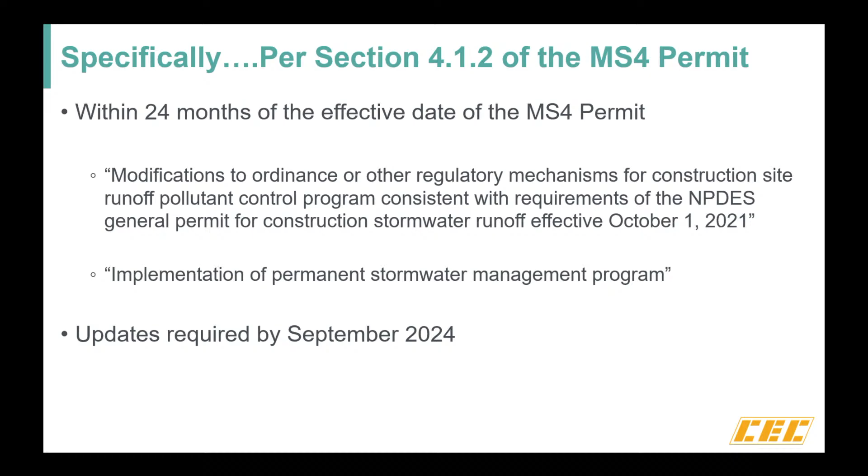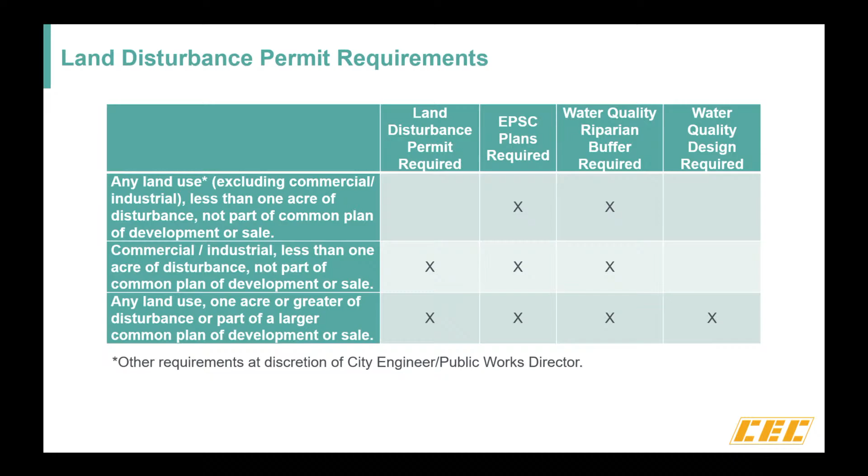Okay, so these are some of the EPSC updates that I felt were more important. With the current CGP that's out, it allows for disturbances to go over 50 acres with some additional requirements from TDEC.

It's very difficult for the city to manage a site with more than 50 acres disturbed at one time, especially from a municipality standpoint, because they've got to have boots on the ground inspecting per their MS4 permit. We wanted to help them meet their permit requirements, but you guys could still disturb over 50 acres if needed. Currently, if you're going to exceed that, you'd have to meet all the requirements per the CGP with TDEC, including some monitoring and sending a shapefile of your disturbance.

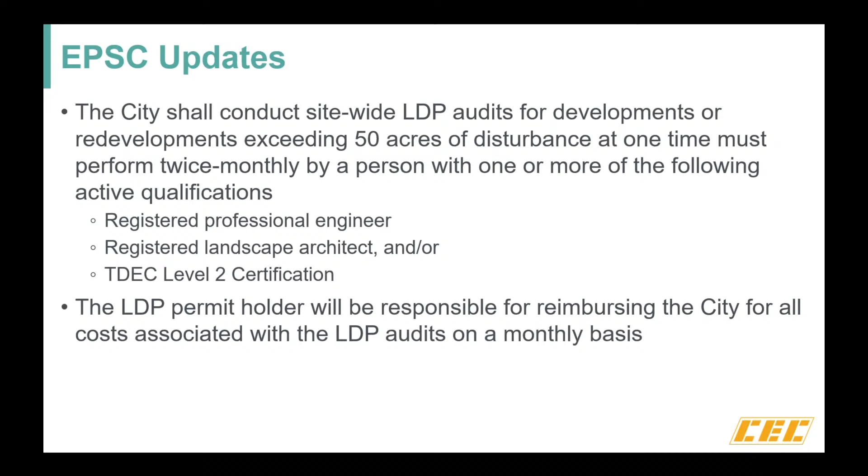In addition, from the city standpoint, they're going to want to see twice-monthly LDP audits performed by either a PE, RLA, or someone with TDEC Level 2 certification. The city would be requesting someone to do that specifically, and you guys would reimburse the city for that inspection, supplementing their staff, because once it goes over 50 acres, that's a big burden considering they only have one inspector. We're not saying you can't do it, but we need help, because that's a significant amount of disturbance and we still have to hit our requirements. So that's the main thing with the 50 acres or more.

The other thing is if you're going to get a land disturbance permit that involves calculations and associated EPSC plans, they need to be prepared by a PE or an RLA with an active TDEC Level 2 certification. There is a caveat: if you're a registered PE or RLA without an active Level 2 certification, you can still do that, but once we get to a third submittal where we're providing comments on the EPSC plans, that engineer or RLA is going to be responsible for the third-party consultant's invoices relating to how much that EPSC review costs.

That's really just to offset the cost to the city. There's significant cost in making sure these plan reviews get done and meet the standards necessary for the city to feel good about carrying out their permit requirements. This is just a reminder to make sure you're following the rules. Theoretically you should know the rules, because hopefully you're taking training from the state via the TDEC Level 2 certification, which would help you put together a cleaner set of plans that meets the requirements of the CGP.

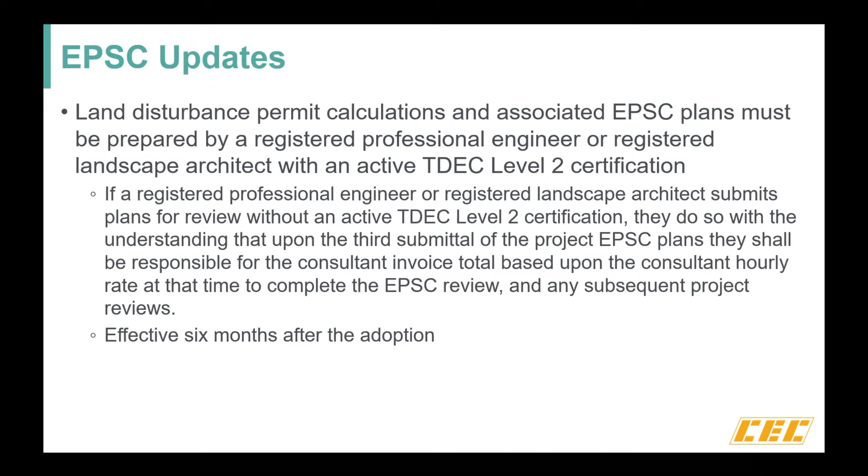This is effective six months after adoption, so that would be October, November, December, January, February, March — March 10th is when this would be effective. So just keep that on your radar and consider that.

Another EPSC update involves when you can remove sediment basins or sediment traps. We're requesting that the city be notified prior to removal, 14 days in advance, so they can come out and confirm that everything upgradient of those has been stabilized appropriately. Then they'll give clearance to convert or remove it entirely. We've had instances where they got converted too early, and the site just wasn't ready for that.

And so that's the main reason for this, because it's not going to be a fun conversation if the city tells you that you've got to put a sediment basin back in after you just converted it to another pond, or maybe filled it in. So that's really what this is for, so that you guys are on the same page with the city about when this happens, because those are significant drainage areas if a sediment basin or sediment trap is required. It's a lot of water. That means there could be a significant discharge of sediment, which would be very bad for the city in terms of meeting their water quality requirements.

The other thing that got updated was the LDP duration section. So basically, if you pull an LDP and get that green light from them, it will stay active until one of these things happens. If you have 6 months of no activity on the site, no dirt moving, then that would be your permit duration expiring. Or it's 3 years from issuance of the permit, or if any new federal or state regulations occur that change the scope of coverage. That would be like if a new CGP is issued or a new MS4 permit is issued that backdates some of those requirements.

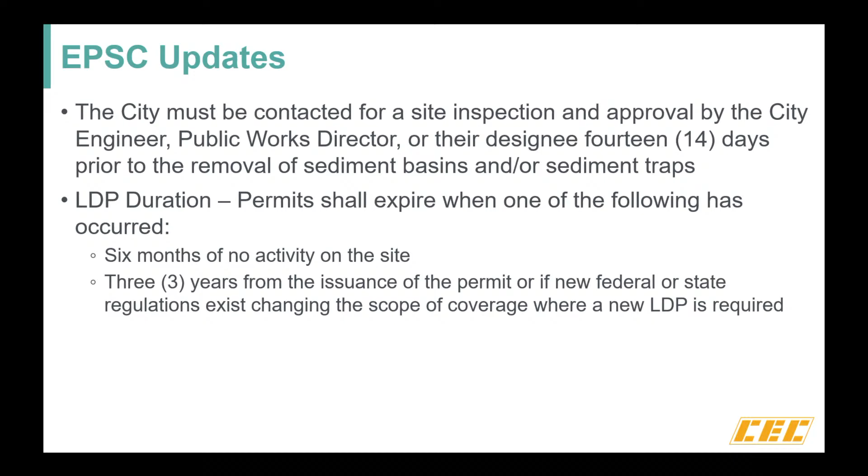So that's that. And then this goes into the water quality riparian buffer things. This is what I was talking about for the 2 upper rows of the chart, where you're not disturbing greater than an acre and you're not part of a common plan of development or sale. If the chart says you're required to do water quality riparian buffers, which I believe applies to the whole chart, any disturbance basically, if you're along a stream you should have at least a 15-foot buffer from the top of bank. So that's this requirement. It's pretty reasonable from a floodplain perspective.

If that stream is mapped or unmapped, there's also additional floodplain requirements. In general, this isn't too big an ask, because if you have an unmapped stream, that means FEMA has not designated a floodplain for it. You have to provide a buffer of twice the width of the stream on either side. So if the stream is 7 feet, you're already at 14 feet. Just something to think about. Unless you had a really small stream, you'd probably be hitting this anyway.

And then for A zones, it's very similar, you have to have a 20-foot offset from the top of bank, so that's greater than this. And if you've got a full-blown mapped stream with a floodway associated with it, that's usually significantly larger than the buffer width required on those properties. It just depends. Sometimes there's a high wall, like some of you have seen at Mansker Creek, where one side is just a straight cliff wall. That's a little weird because usually the floodway hugs that wall, but in a lot of instances the floodway is actually larger than that.

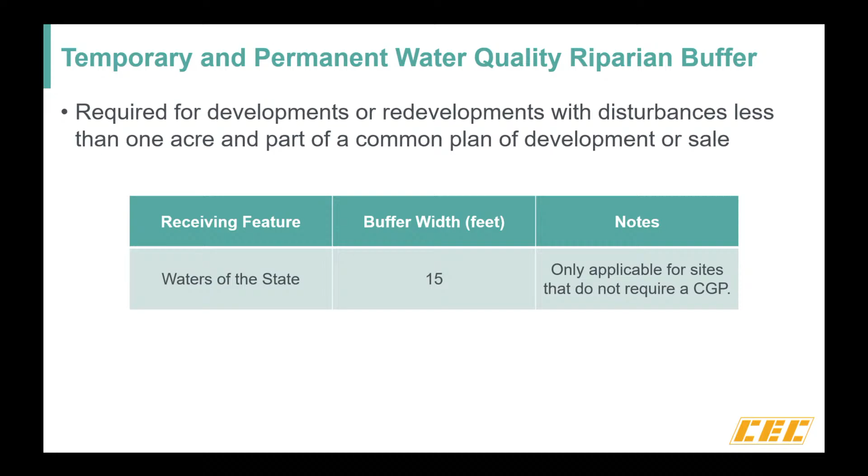And if you're in an area discharging to an exceptional Tennessee water, or a water that is impaired for sediment, siltation, or habitat alteration - and additionally, waters with federally or state threatened and endangered aquatic animal species - as some of you may know, the city of Hendersonville has a lot of streamside salamander, which is a state threatened endangered species. That's kind of the caveat for this one.

Sometimes there's a significant gap between finding that species and TDEC being able to put it on the exceptional Tennessee waters list. In an effort to protect that species more, this is how the city of Hendersonville has decided to handle it. So if you're near a stream already listed as an ETW for streamside salamander, you'll probably want someone to check if that species is on your property. The city will likely ask about this during review, but if you talk to them beforehand and they know there's likely presence, you can figure that out early. It's always good to have initial conversations with the city before doing anything wild and crazy, especially if streams will impact your buildable space.

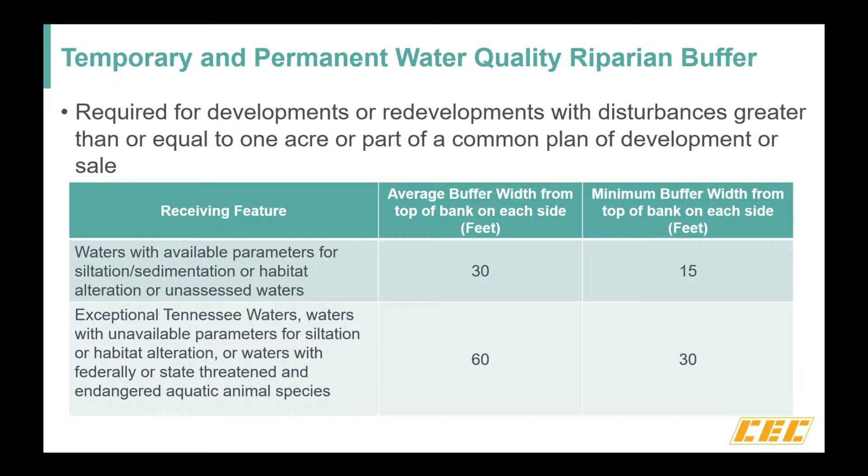There are some allowable, permissible uses within that permanent water quality buffer, and these are all listed in the ordinance. Greenways, biking trails, and walking trails are allowed. Within the outer buffer, you still have to maintain that minimum unless you go an ARAP route and have a crossing or something like that. The trails have to be constructed of pervious materials if they're going to be a completely allowable use that you don't have to offset.

If it's constructed of impervious materials, then you either have to direct that runoff to an infiltration-based SCM, or in my opinion, the easier way to handle this is to just provide that additional buffer width somewhere else, like alongside the trail on the other side of it, or somewhere else on the property.

You can also have infiltration-based SCMs in the buffer, but you're going to have to make sure you have infiltration in those areas, which is usually difficult right next to a stream because the groundwater table is high, so think about that before you try to do that. It's probably not going to work out necessarily. And then you could have road and utility crossings and selective landscaping and or habitat improvements.

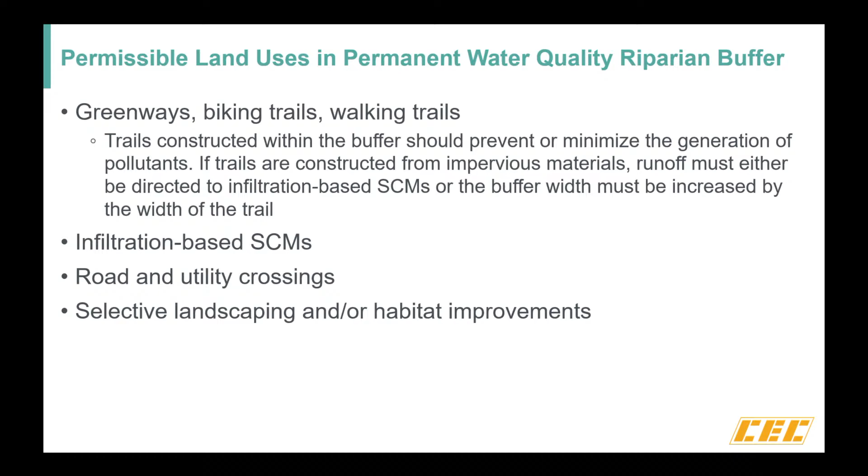So this is usually where I'm like, infiltration-based SCM, what's an SCM? An SCM is a stormwater control measure. It's a big part of the new MS4 permit. From TDEC's perspective, it's a permanent practice and a measure designed to reduce the discharge of pollutants from new development or redevelopment projects.

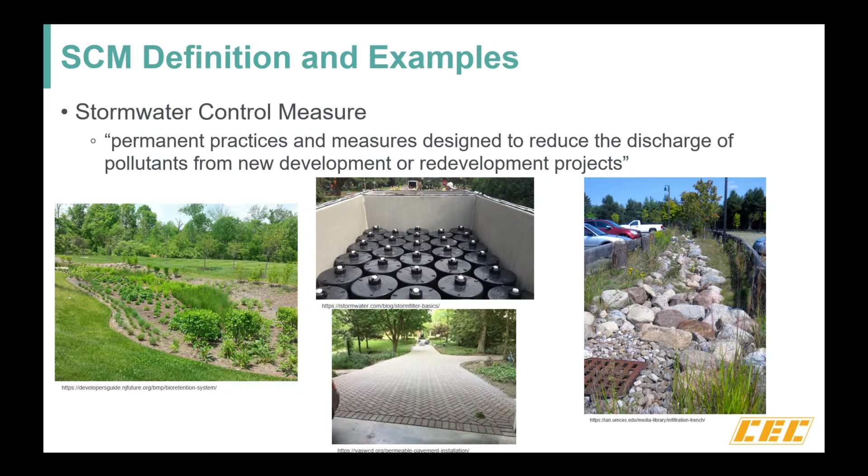You've probably seen these a lot in other cities, so it could be permeable pavement, bioretention, to a certain extent it could be extended detention if designed correctly, infiltration trenches, it could be a proprietary practice such as a filtration system. It could even be paired with a hydrodynamic separator potentially. So those are the types of measures we're talking about, which brings me into the water quality treatment volume requirement.

I'm sure this will be published or sent to you guys in an email, so I highly recommend taking a look at that video, because I don't want to rehash all this, but just know that this is an additional requirement. It's new. TDEC got it passed via a rule, and then they included it into the permit. So this is something that's going to be sticking around for a while. I recommend figuring it out and learning to work with it, because it's here.

And alongside that, you can probably guess that because we have that chart, because it's required by anything that disturbs greater than an acre as part of a common plan of development or sale, we're going to have a lot of these things, which is just as exciting for you guys as it is for the city, because they've got an additional thing they have to worry about too.

In this, the permit requires that they come up with a way to make sure these things are installed the way they were put on the plans within 90 days of final construction of the SCM, which, hopefully to you guys, it's just as exciting for them, because now they've got something else to track and run around and be like, oh my God, was it installed? Was it installed correctly? Do I have proper documentation? Because if not, TDEC is going to be mad at me.

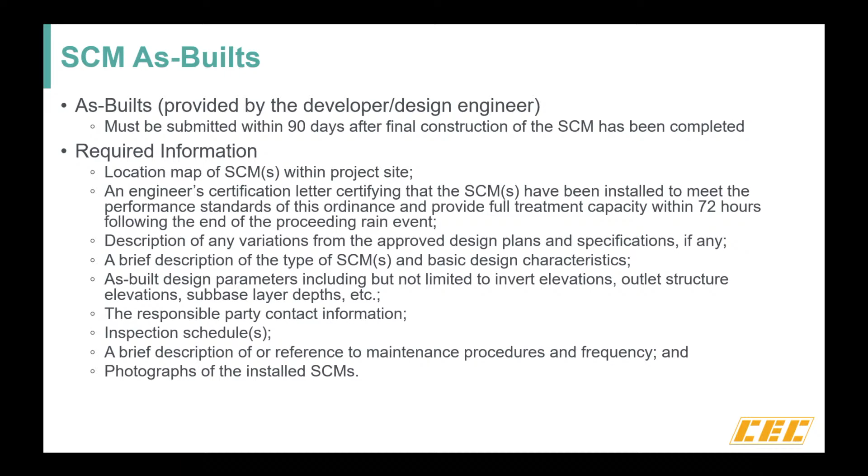Another requirement in place for a while is that the city has to know where all of their stormwater inputs are. So if the city owns it, it's dedicated and operated by the city, and there's an inlet that eventually discharges into a water of the state, the city has to know where that is.

A lot of this has been done over time by consultants going out and physically mapping these areas, so Hendersonville has a really good base for what's out there right now. But as we build and get all these neighborhoods and people move in, we have to know where those inputs are again, otherwise the city would have to go out and map those again. The contractors are already out there putting the things in the ground, so they generally know where they are.

So what we're asking for is the location of those, the direction of flow - this is all information TDEC asks of the city: location, size, direction of flow, things like that. We've tried to make it a little easier - we've put together an Excel spreadsheet where you can list all these assets, the flow direction, and that will help facilitate the city putting it from Excel into their GIS mapping program, so we don't have to put it into GIS for you. Otherwise it'd be in a different format, and it'd be a disaster.

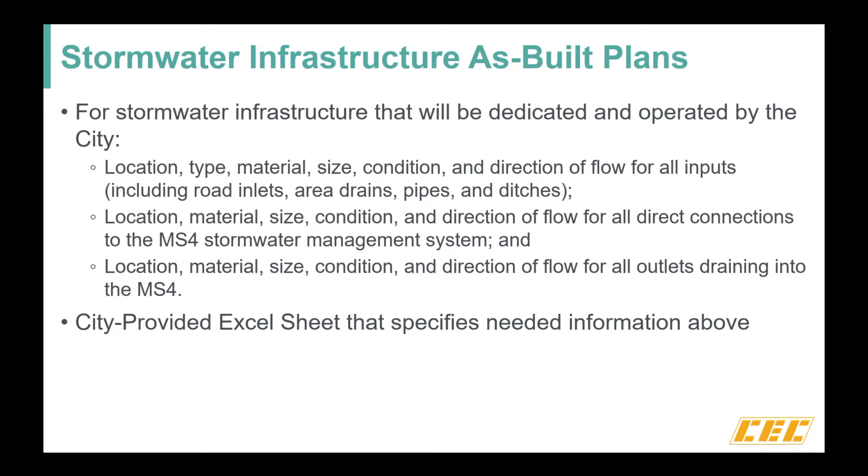So once you're getting close to finishing a project that's going to have a lot of infrastructure dedicated to or operated by the city, I'd reach out to the city because they have this Excel spreadsheet, and we can help explain that in any way needed to facilitate that happening. And now I'm going to stop talking.

Are SCMs going to be part of this? I know you had a category there of treatment. Is that similar to what Metro has now - is it 80% TSS? Yes, TSS is used as an indicator, and it has to be 80% TSS removal.

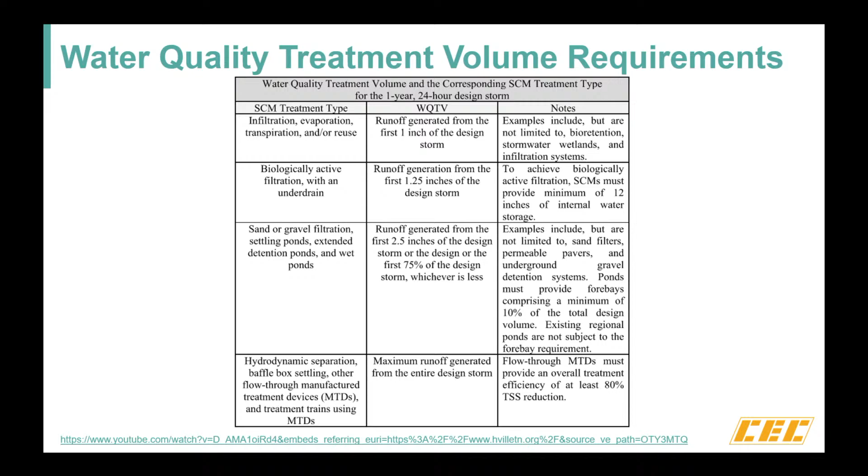The volume is what's largely different from Metro. Metro is, I believe, all based off of a 1-inch storm event, which is similar to the first row of this chart. As you move down the chart, the volume gets larger, so the practices generally get larger in turn. That's pretty much the basic thing - so it's similar, but not really.

Metro's permit will be updating too, because this was a state rule. When they get there, they're not a small MS4, they're a large MS4, so when their individual permit gets updated, it will include this chart. So in the next couple of years, it will hopefully all be very similar across the state instead of having different requirements. Anybody else?

Just before we move on, I guess? No? Okay.

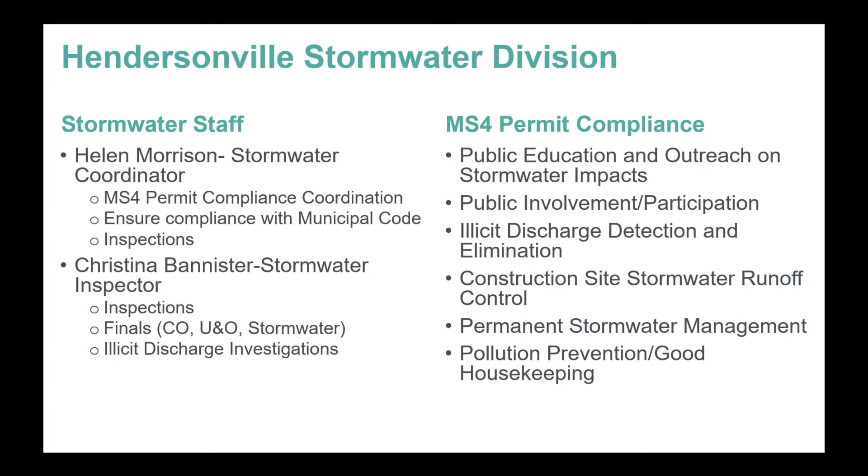For construction site stormwater runoff, really the main component there is land disturbance permitting. I'll talk to you about the process changes we've gone through over the last little bit. The city implemented an EnerGov application, and you may be familiar with it if you've worked with some of the surrounding municipalities.

I think they've also used the same thing through Tyler Technologies, but it's called EnerGov, and then kind of the user-facing side of it is Citizen Self-Service Portal. So I know Gallatin uses the same thing, so if you've done construction in Gallatin and gone through their permitting process, this is very much going to be the same. But the biggest change for us was absorbing the land disturbance permit plan review into the planning review cycle.

Right now we have site plan, construction plan, planning department review. Your EPSC reviews are going to be incorporated with that review. So we've updated the checklist to incorporate EPSC requirements and ask for the appropriate documents so that everything's combined and accomplished and reviewed in one review period, versus the back end where you would get your stamped approved plans from planning, and then you would come see me, and I would crush all your hopes and dreams and tell you it was going to be another 4 to 8 weeks before you could start construction. So very much so, this is a more efficient process.

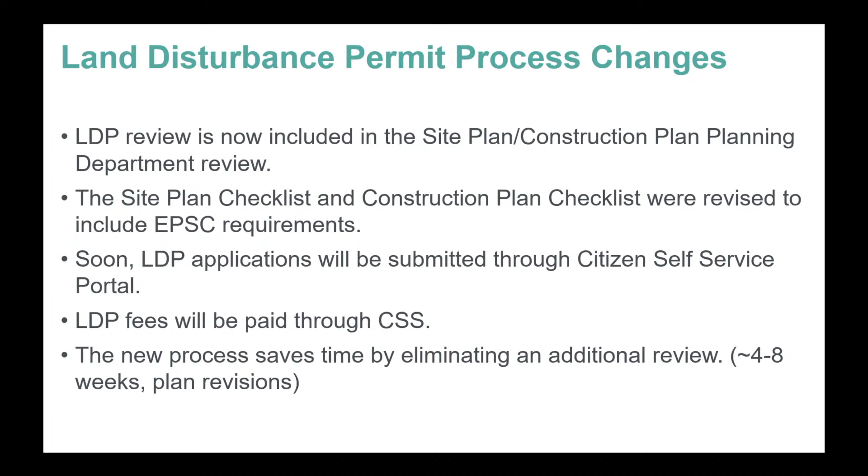But if you'll take a look at everything, you'll have the planning review. So that'll go through that cycle. They're on a pretty strict, like two week review period, so they're not going to be stagnant. A lot of times with LDP, before we started working with consultants, we had a lot of lag time just because it was me and one other engineer looking at plans. Once we moved into working with CEC as our review consultant, we had a set time frame, but now with planning, the time frame's even shorter, so the turnaround's quicker. You're looking at typically 7 to 10 days of getting comments back from the city. So a much more efficient process.

Once you get your stamped approved plans, you'll submit your land disturbance permit application. Right now, that's coming directly to me, generally through email, but we're slowly transitioning to the Citizen Self-Service Portal. So you'll go online, take your stamped approved plans, complete the application, fill in all the fields, submit your plans and other supporting documents, and go through the process that way. It'll hopefully be a seamless, quick process.

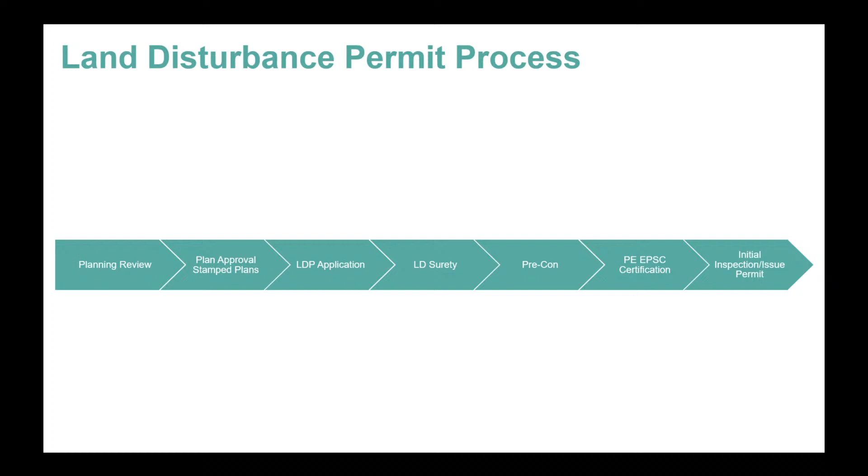So just a few details about the land disturbance permitting process. Christina touched on those. During the planning review, either internal engineers or an external consultant will review the stormwater quality and quantity.

Generally I'll go out and do preliminary investigations when we get a site plan or construction plan submittal, just to ensure that all water resources have been properly identified. Sometimes, if we see something questionable, that results in a request to do a hydrologic determination. We've had a few of those, but a lot of it revolves around protecting those resources and checking to see if it's suitable habitat for the state endangered streamside salamander.

Your land disturbance permit must be submitted with all your applicable state and federal permits. So really, we're focused on the construction general permits, ARAPs, and any Corps permits. Then, of course, your surety, which is $10,000 per disturbed acre, and we round that up. Recently, in our discussions for our stormwater management program, we talked about adjusting that annually using CPI as a guide.

And like I touched on before, a PE must visit the site and inspect the installed EPSCs and certify those prior to us scheduling an initial inspection. The reason we started doing that is really just to save time, because you have so many sites ongoing and starting up that we'd be going out to the same site three, four, or five times for something simple like a construction access that just wasn't installed properly. So that's why we really harp on following your plan and following your details.

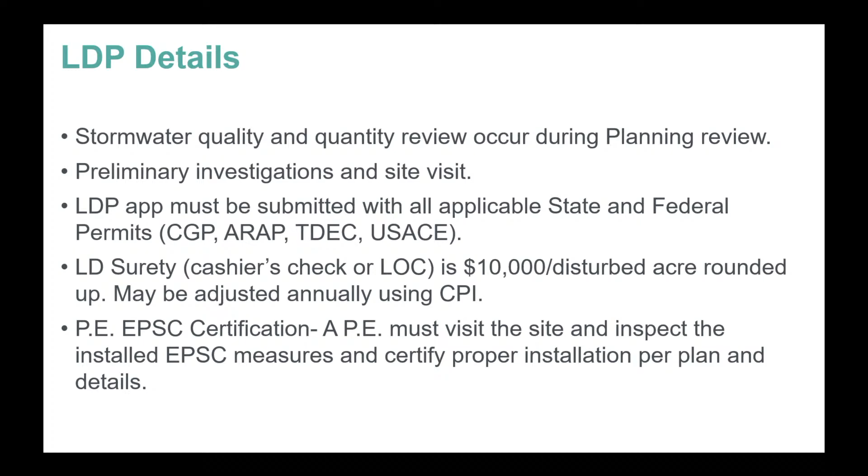So Christina talked about the 15-foot water quality riparian buffer requirement for individual lots, covering individual lots in general that are not part of a subdivision or larger common plan of development. CEC provided us with a form that they used for Bowling Green, and we modified it to suit just individual lots in the city. So this way we have a quick form that a homeowner can fill out.

They can select the option of what they want to install for their erosion prevention and sediment control if they're putting a pool in or doing any kind of grading activity on their property. That way we don't have to issue a land disturbance permit specifically - it goes through the building permit process.

So this is just a form. If you are a home builder in the city or you're building in a subdivision, this is a form you're going to see when you go to get your building permit for each lot. Hopefully it's something that's easy to fill out and quick, and you can quickly identify by selecting an option or combination of options what you want to install on the lot. But it's really more or less just a way to communicate with anyone doing work within the city, whether they're an individual property owner or a developer, that we have the expectation that you're going to install EPSC measures on each individual lot, and you're going to keep sediment on your site.

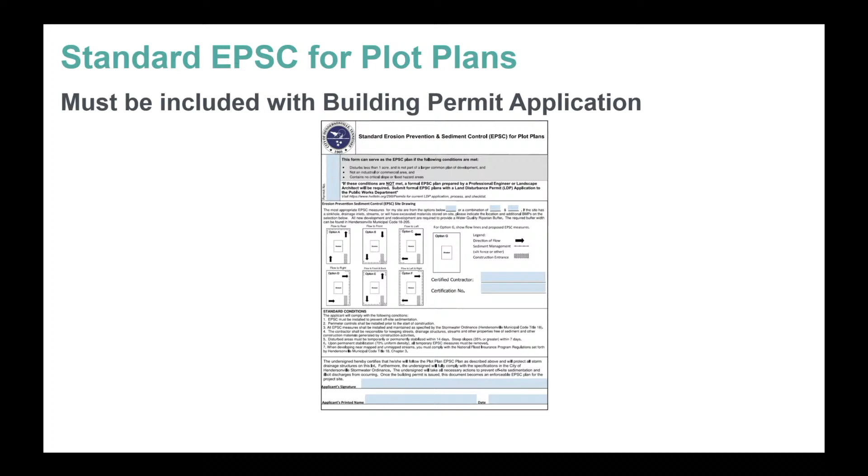So we did talk about the streamside salamander. They are state endangered, and there are several different requirements that go along with being a host to this amphibian. The main one is your ETW stream buffer requirement, so you meet the criteria for a 60-foot average buffer, 30-foot minimum, but that's the minimum.

The other thing is we really encourage coordination with TWRA and TDEC on this. So if you are developing and you have a stream that's probable habitat, we're really going to look closely at that. TWRA is requiring surveys if you are within a 4-mile radius of a known salamander presence in another stream - they say that's kind of loosely based. Like here in Hendersonville, they've said more than likely we're going to ask for surveys just because they're everywhere in Hendersonville.

So that's their general requirement. They want you to do a salamander survey between December 15th and March 15th. You have to do 2 of them, and they have to be at least 45 days apart. We don't require that—that's a TWRA requirement.

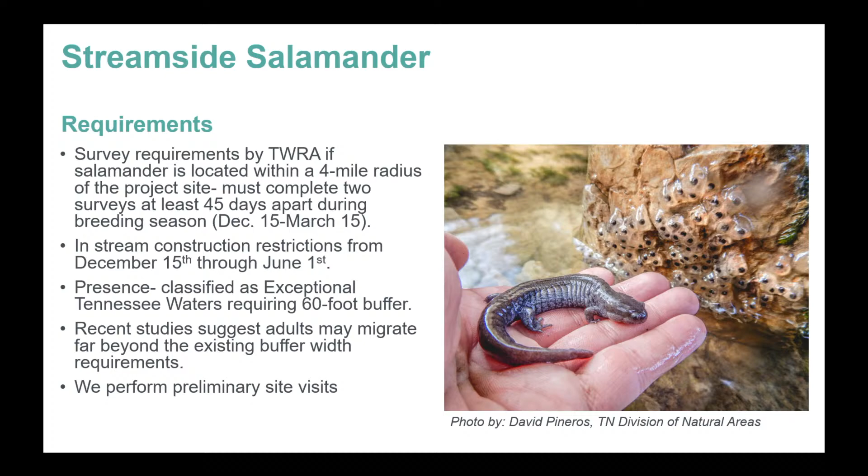So like I said, we do perform preliminary site visits to go out and investigate. If we see a need, we will communicate that through the plan review.

If you have gone and applied for different permits or inspections, you've probably already seen it—you probably already have an account. Biggest thing is you do have to register for an account to be able to use it. For our purposes, we want you to use a good email so that the same email can receive pertinent information about inspections and permitting and all that.

I just went over that standard EPSC for plot plans—that's something you're filling out when you get a building permit. You do not have to apply for a land disturbance permit if you are less than an acre. Now, if you are building an individual home and you are going to be grading, doing land disturbance activities that exceed an acre, you would be completing the land disturbance individual lot application.

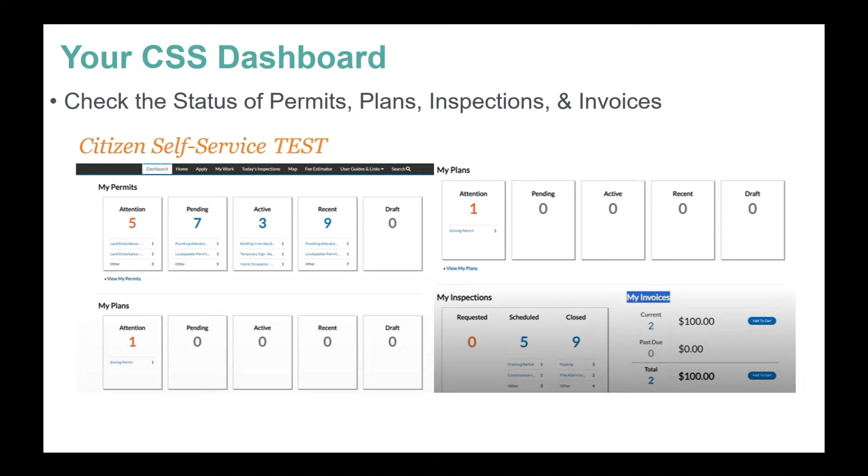Hello everyone. I'm here to go over some stuff with you guys, and just an introduction to me if you haven't dealt with me before: I've worked for the city of Hendersonville for about a year now. I previously worked for the city of Gallatin and the city of Union City, so I've worked throughout the state of Tennessee. I also took a little hiatus to the private side of construction, working for large data centers throughout Georgia and Alabama, but came back to where my heart is, local government.

We'll be covering some facts about pre-construction meetings, during construction, what the expectations and desires are for the city of Hendersonville, and bringing you up to key points and questions you may want to ask to help you be successful as you're building in the city of Hendersonville.

When you get done with your CSS portal and you have successfully got a stamped set of plans with our city, you'll be instructed to get a pre-construction meeting with me. I call it a team meeting - we all get together, meeting of the minds.

There'll be some required attendees, such as the permittee, which is the responsible party, the general contractor, which should be signed on to the notice of coverage or notice of intent, the grading contractor, which has the same responsibilities, and then the twice weekly inspectors, which are vital to you during your construction activities.

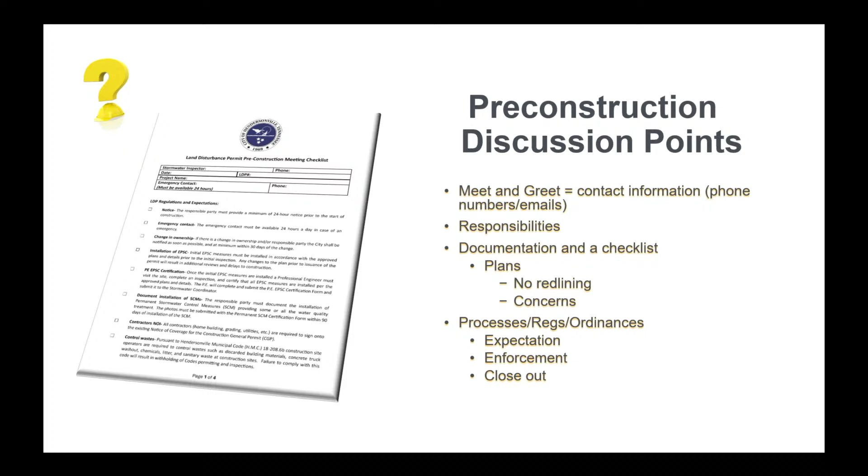Before you get started in construction, as Helen talked about, we will have an initial inspection. The PE will be invited to come out and do an inspection. They'll have a certification form, which is part of the forms we'll go through on the checklist. The PE will go out there, say it's good, and turn that in to the city. Helen will go over that, and you'll give me a call and say, hey, we're good to go, can you do your initial inspection? I will then go out there, make sure everything's installed per that first stage of construction and the EPSC plans, and then we get started on construction.

You'll be ready to go. You'll have the LDP. Right now I'm sending them by email, so everybody will get an email saying, hey, you're ready to go. Good pre-con, good inspection, so everybody's happy at this point.

During construction, we're going to talk about some stuff just to make sure that everybody's on the right foot. Inspections by the city of Hendersonville, I consider them audits. We are compliant to the MS4 permit, which we're contracted by the state.

Your compliancy is done by your twice weekly inspector. Great communication between your on-site contractor and your twice weekly inspector, which a lot of times I think you guys have third parties that you hire, is what I've seen for the most part. We have various ones throughout the city of Hendersonville. Please, I really encourage you to talk with them, meet with them. They're out there two times a week. See what your site needs, get that stuff fixed.

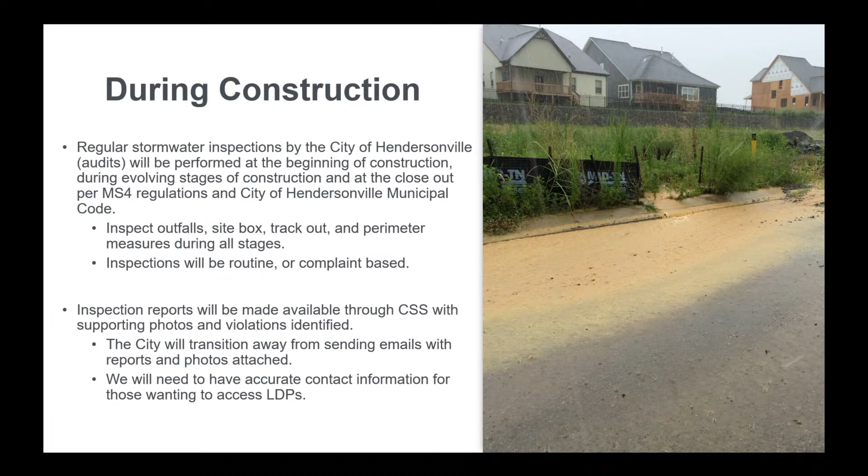Inspector-wise, on all of your sites, minimally, you're going to have me. Yay. Nobody's excited right now.

Twice weekly inspectors through the state of Tennessee, unless it's changed, it's just when it's over an acre. If you're under an acre through the city of Hendersonville, you still may have me on a complaint-based issue, or I might just be going by there because there's critical environmental areas. So minimally, you'll have me, but you may have to have a twice weekly inspector as well if you're over an acre. You may have to have more if you decide to disturb over 50 acres. If you do that, I'll get a little bit more into that later on in the slide, but just minimally, that's where we're at.

Another inspector for Public Works is Tommy Hoffman. I talk about him pretty often during the pre-construction meetings. That way everybody's aware when they're doing sidewalks, road, or public storm. He will be inspecting that, so I'll give you his information. He will not be part of the pre-construction meeting. There's only one of him here too, so we're kind of spread out pretty thin, but Tommy's here today too.

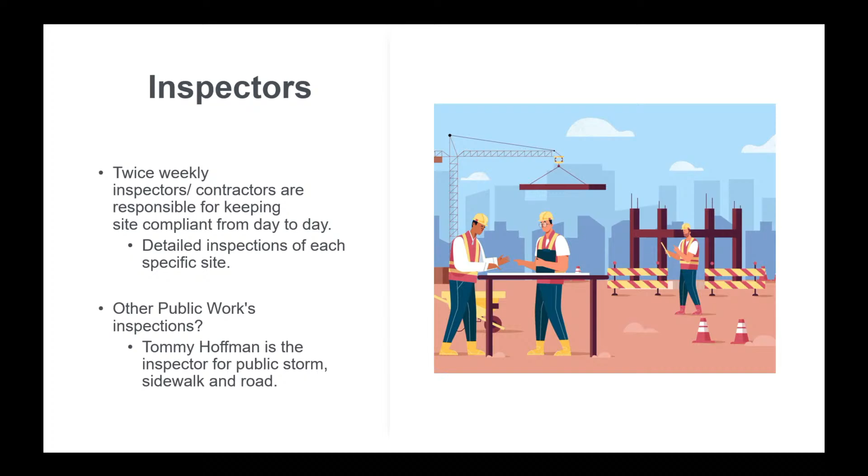Some key points I wanted to go over.

I want to make sure you guys are successful. I don't like anybody getting surprised. I know when I was on the construction side, I didn't like getting into stuff 3 or 4 times. I wanted to get it taken care of, so I'm just going to go over some stuff and hit some highlights.

If you're over 50 acres and disturbing more than 50 acres, there will be a lot of extra inspections between the state and the city, and they will be required to be on site. I'll be looking in that box to make sure it's in there. That's part of an audit item that I know the state will ask for when they come and audit us. They do audit us on construction site runoff as one of our 6 minimum measures.

So just FYI, that site box - if you're already dealing with me, you know I'm like, what's in your site box? Do you have your NOC? Do you have your LDP in there? Those things are minimal, so those are easy things that should be on site. It helps your twice weekly inspector. All of those things should be on there.

Priority sites with the city of Hendersonville are a little different. With the new ordinance, construction sites discharging into or immediately upstream of Tennessee waters of the state - that means unavailable parameters for siltation or exceptional Tennessee waters. Also, our little friendly salamander here, you want to be aware of him.

One thing that came up here recently, I've had 2 or 3 people ask about it, so I wanted to go ahead and hit on that: the difference between land disturbance permits and notice of coverage permits to the state.

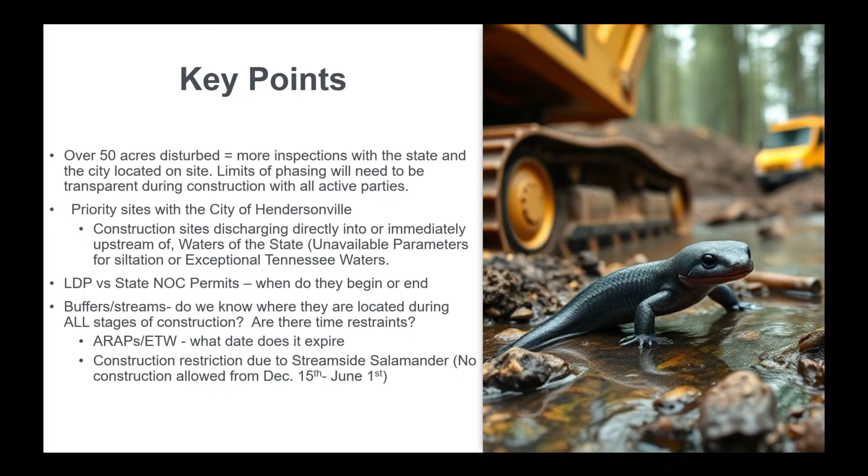I want to hit on ARAPs and ETWs. As far as ARAPs, I want to remind everybody these have time constraints - they have expiration dates. Also with that, you have the friendly salamander playing into that. So if you're working in a stream and you have an ARAP, please coordinate your times between the ARAP and your salamander friends, because you can only get in the stream and work between December 15th and June 1st, and you want to coordinate that time right. So make sure you get your ARAPs taken care of, those critical areas taken care of in a timely manner before the expiration date, or before December 15th or after June 1st.

Install the EPSCs and SCMs per the city's approved set of plans. I get phone calls from time to time asking, Christina, what do you want me to do? My reply is always the same: keep your sediment to yourself and build per the city-approved set of plans. So if that helps you in any way, go back to your plans.

I'm just an inspector. Just build it per the plans. If you need changes, go to your site engineer and talk with them ahead of time. Don't kick the can down the road. Get it taken care of right now so we can all keep moving, so it can get to our city engineer and we can get a resubmittal if there needs to be a change to any kind of permanent SCMs.

Outlet protections, construction accesses, inlet protections, basins, structures in the basins, the BMPs, the spillways, all that good stuff - I will be inspecting those throughout construction. I might not hit every single one every time, but construction accesses are a big thing.

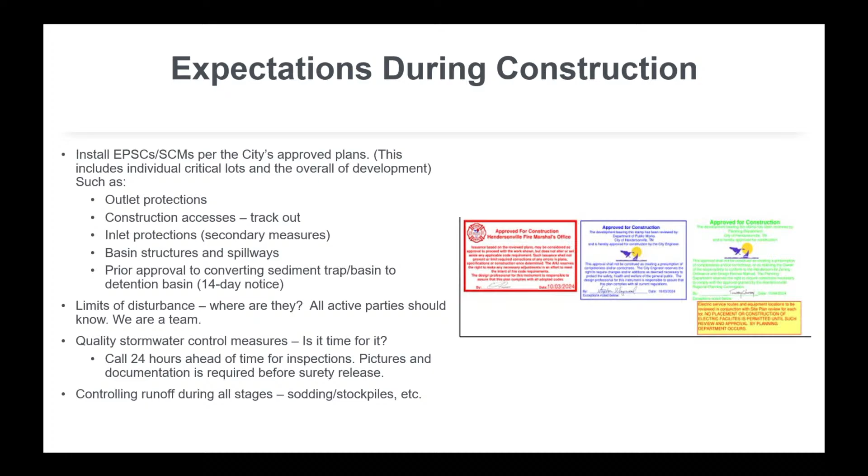Controlling runoff during all stages, that includes sodding and stockpiles. Just FYI guys, when you get to that point - if you make stockpiles at the toe of the slope and you have two stockpiles, you're creating a concentrated flow.

Just make sure you're leery of that while you're building. I'm not going to tell you not to do it, I'm not going to tell you how to do your job, but as a contractor working in the state of Tennessee, you know how that goes when you're going into a silt fence. It doesn't go well. So just keep that ahead of yourselves.

If it comes to a point during construction that there's negligence and it seems like we're getting illicit discharge going into streams, going into environmental areas, or there's repeated deficiencies, this is where our enforcement response plan comes in. The city of Hendersonville is required to have an enforcement response plan through the state permit. Every municipality can adopt that as they need. This is just a guide to let us know what we need to be doing.

I try to be very fair and work with everybody, but I feel like it's time, and when it's time, it's going to be a little more stringent coming up. So your twice weekly inspector keeps you compliant, but when I go out there, you're going to have 7 days with a verbal or written warning. I'll come out, I'll tell you, or you'll get a written warning saying you've got 7 days to fix this. If I go out there again, that means twice in a month I'm going out there, and you still have an illicit discharge, or your silt fence is down, there's track out, there's stuff going on. You'll have a CAP plan, a corrective action plan.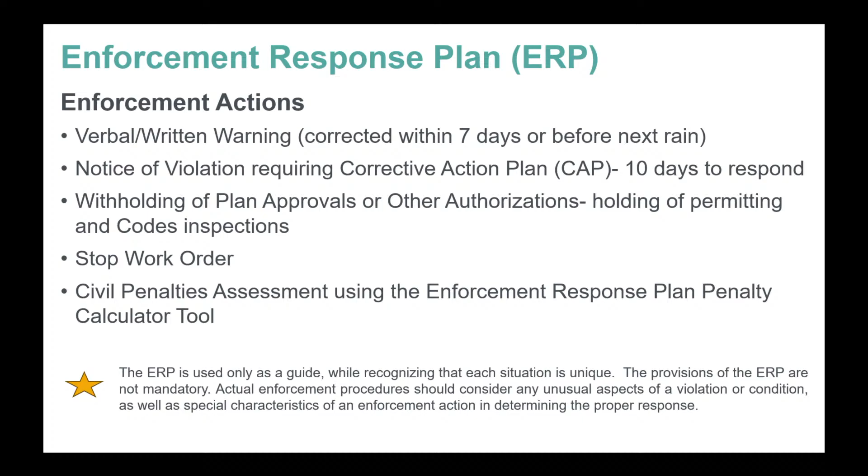So it's not going to be, I have 7 days, then I have 10 days, then I have another 10 days, or nothing where you're doing math like that. If we're giving you a time frame, we expect an immediate response to eliminate or resolve whatever issues are identified. But we use discretion, and each site is different, each violation is different, so just keep that in mind.

We just rolled this out. It actually went before our Public Works Committee for review. I haven't had a chance to review their comments or questions on it, but this is the direction that we're moving. So if we do have continued violations or frequent offenders on the same site, then we will utilize the calculator to administer penalties to the site.

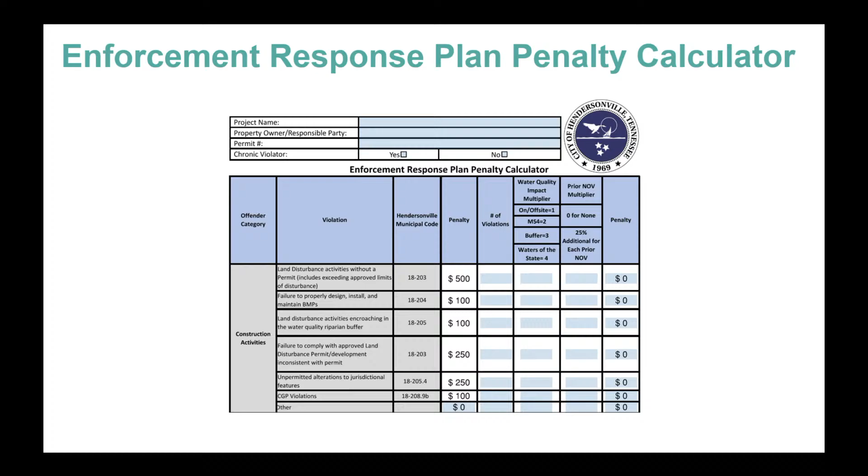Okay, now that we got over the bad part, I feel like we all just got speeding tickets. End of construction inspection for stormwater—this is the good part. We're at the end, we're getting ready to turn over, and we're getting ready for the inspections.

Storm infrastructure is a big thing, especially if it's something the city's going to accumulate and own. We want our citizens to be taken care of. We want the capacity of them to be at full rate, which means I'll be looking down, and I'll also be looking at documentation of whether we've been allowing debris to get into the storm infrastructure. More than likely, at one point or another, I've noted, hey, it's great, or hey, you've had a blowout, let's get that cleaned out.

The famous saying, only rain down the drain, is a true statement, especially when it comes to our subdivisions and what's coming over into the city, to our city tax dollars and fees. TVing may be required, so keep that in mind when you start seeing in my paperwork that says you've got sediment in there, it's starting to get at full capacity or show some capacity, you need to get that cleaned out.

I highly recommend going ahead and just getting that removed, that way it doesn't travel. Removing all the EPSCs, all of our temporary measures, just go ahead and get them out once we have stabilization.

And then our SCMs, our permanent stormwater control measures, we want to inspect them, make sure they're good to go. That includes our water quality units, retention, detention structures, all the BMPs of the basin, your spillways, make sure they're installed properly, swales, and outlet protections.

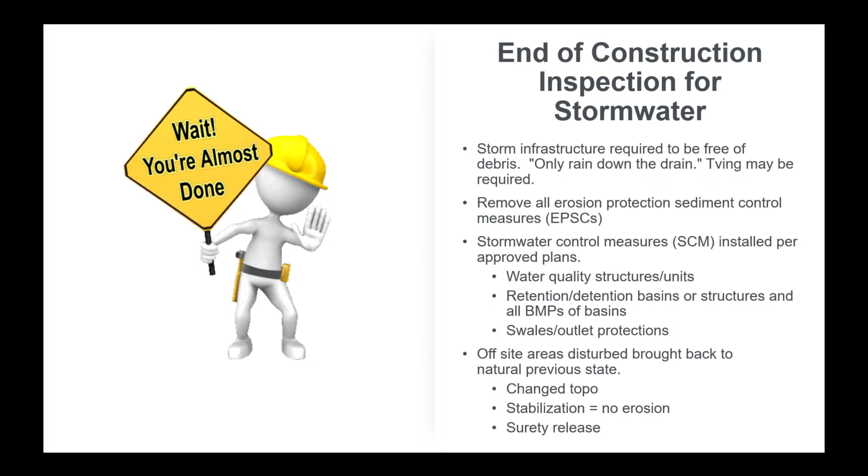Off-site areas disturbed need to be brought back to a natural previous state. I see this more in commercial sites because they don't have a lot of room, so they have to use off-site areas every now and again. We just need to make sure we're changing back the topo, or stabilizing everything the way it used to be, in order to get the full surety release.

Stabilization, since we've had changes, I wanted to go ahead and talk about this. I've seen a lot of sites with boulders or rocks in the grass that's getting handed over to our citizens. That is not okay. We need to make sure we've got topsoil down there, that the grass is going to grow, and there's not going to be erosion heading into our streams and our environmental areas.

That is something I am looking at as far as surety releases when I'm walking through during the final walkthrough of phase 1, or if it's a commercial site. I will hold up the surety release, talk to Helen, talk to the city engineer. There will be pictures, and we will hold up surety releases when it comes to something that is not stabilized.

I also want to talk about slope percentage. When we're getting into proper stabilization, please look at your plans on how you're supposed to be stabilizing anything that's over 35% grade.

Also, city permanent stabilization and the newest ordinance that's been passed, I wanted to go ahead and put that definition out there. I'm going to kind of save it, but please, when you have time, look at that and make sure you're meeting it. Equivalencies might be riprap or permanent geotextiles. There's all kinds of different measures you can put in place of that.

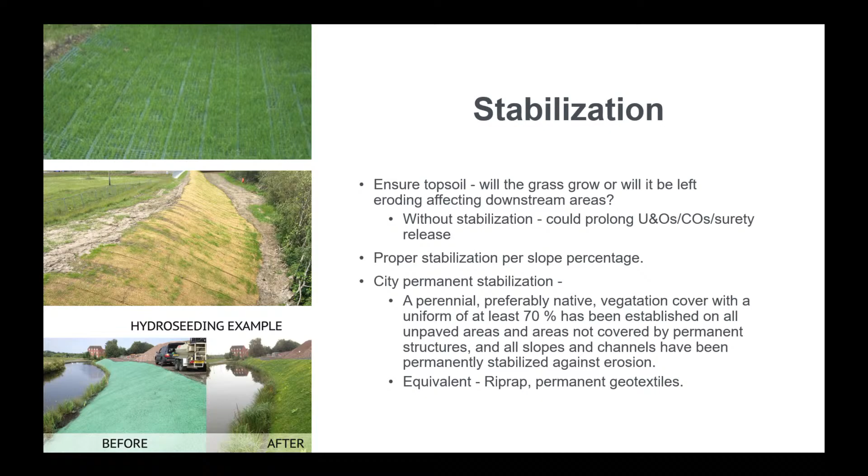And that is all for me.

I'm sorry, I'm so sorry. This is the last bit. Do we have any questions online? Okay, so, all right, I promise, we're almost done. And for the long haul.

So obviously, Christina went through our during-construction process, and we're getting into our closeout process for the land disturbance surety release. Christine touched on several of the documents that are going to be required to get your money back. You have $10,000 per acre rounded up. That's a lot of money, whether it's 1 acre or 50. So we want to have a seamless process to get that money back to you, but we do require certain documents to be submitted to get that land disturbance surety released.

We require the TDEC notice of termination. They want to, of course, terminate their permit, but we want to ensure that you've terminated the permit, so technically you wouldn't be able to go back out and start construction. We want everything closed out that is permitting active construction at the site.

Next, we will require a professional engineer permanent SCM certification form. Christine talked about all the different documents or requirements the state has put on the MS4 for permanent SCMs, location, our responsible party, the inspection and maintenance frequencies, all that. Those things are going to be contained within your inspection and maintenance agreement and your long-term maintenance plan, but this requires photos and the location of these SCMs, and then just a certification from a professional engineer that they are functioning as designed.

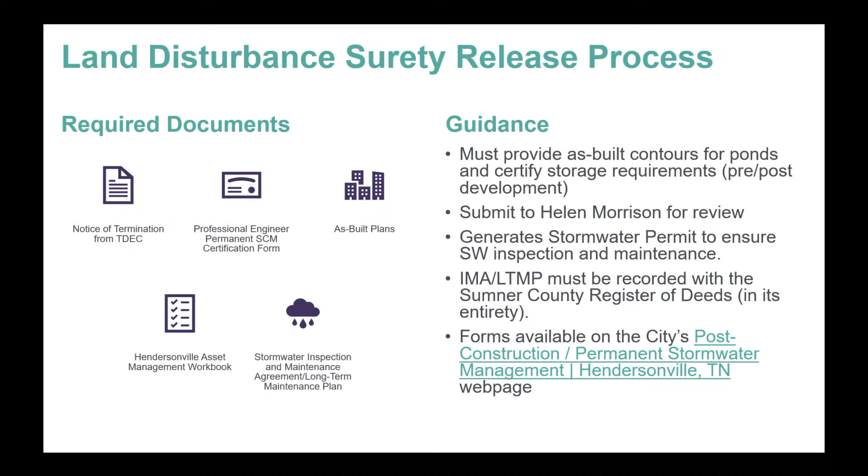Christine really touched on why we require all these documents, but sometimes people like to actually see where it's required. So these are the sections from the MS4 permit that require us to develop a storm sewer system map—that's why we have the asset management workbook. We're also required to develop and implement a verification process to document that the SCMs have been installed per design specifications within 90 days of installation. That's why we have our SCM certification form and require those as-built plans submitted.

And of course, we're required to ensure permanent SCMs are inspected and maintained in perpetuity, so we have to have a legally binding agreement and a plan in place to do that. We're also required to track all SCMs within the city. We're going to use the same process for our permanent SCMs and inspection and maintenance agreements as we do for land disturbance permitting, but we're slowly working toward it.

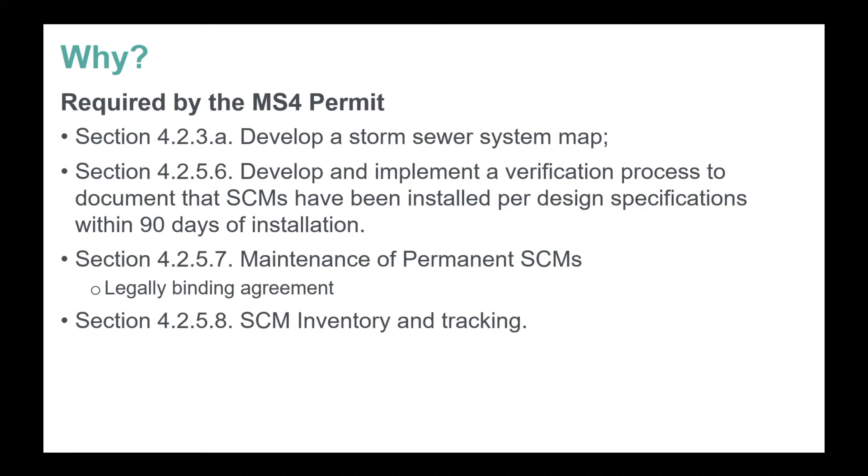Right now, everything just gets submitted to me. In the long run, we will go through Intergov, through the Citizen Self-Service Portal, so you'll be able to log in and submit an annual report for your SCMs, which would be due per your inspection and maintenance agreement—due on July 1st of each year.

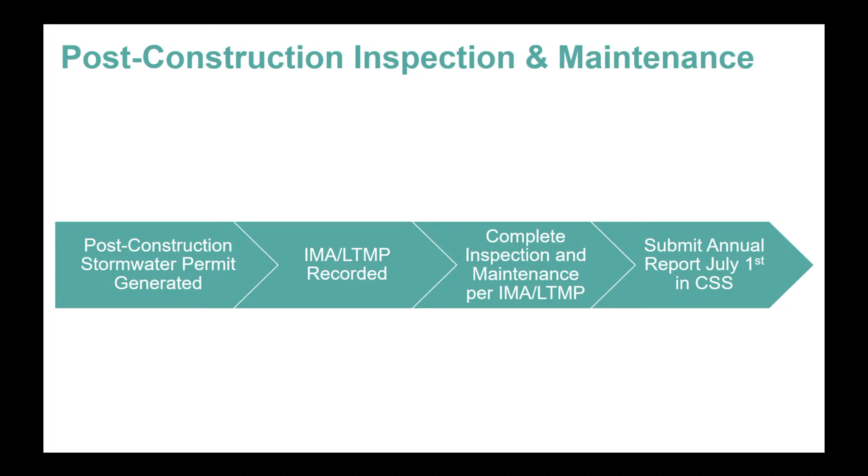That's just a little process chart. We generate your post-construction stormwater permit and give you the number, which is attached to your IMA and LTMP. Then you complete your inspection and maintenance throughout the year per your long-term maintenance plan. The frequency of inspections is indicated on your plan, along with recommended maintenance. Then each year on July 1st, we'll submit that annual report. We'll have a form available online, and you can upload pictures and all that through the Citizen Self-Service Portal.

We're at the Q&A part. I don't think we have any questions online at this point, but does anybody here have questions?